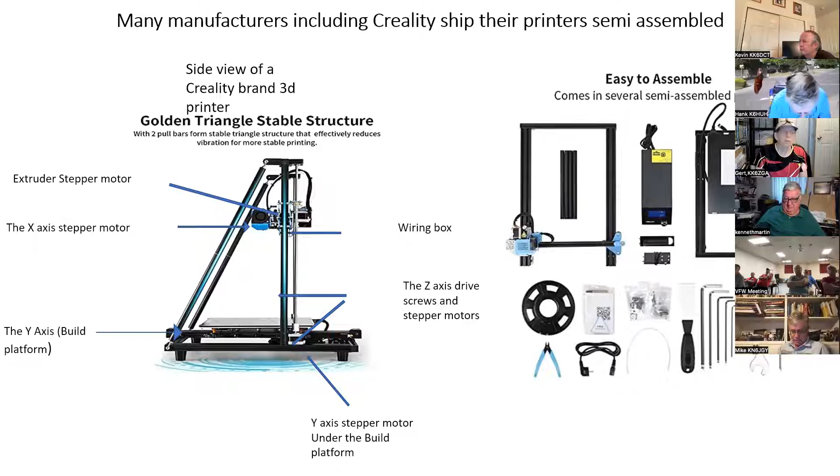Commercially available hobbyist 3D printers: there are over 60 products available, starting at under $200 up to tens of thousands of dollars. Many are available from Amazon. Some popular brands are Creality, Prusa, MakerBot, Ultimaker, and many, many more.

Most of these products come only partially assembled and so require some assembly by the end user. To maintain the repeatability as advertised, care must be taken when assembling to use the proper manufacturer's torque specifications on all the hardware. It is always prudent to use the German torque specifications known as good and tight, rather than SAE inch pounds. For the Chinese products, the Asian good enough specs may be used. Keep in mind, all of these products use small metric fasteners for assembly.

Most of these kits come with a set of tools for assembling the printer. And that was shown on that last picture.

Not all 3D printers are commercially manufactured. Gert and I have a friend of ours who is building his own right now. It'll end up being about 4 by 4 by 4 feet.

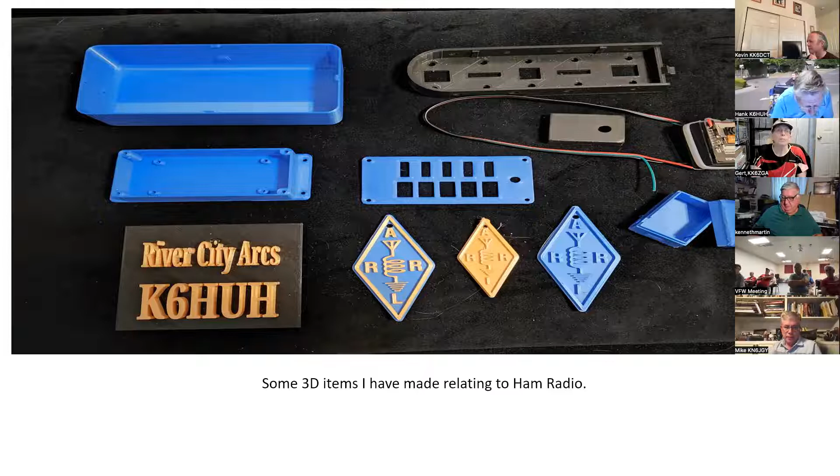Another use could be antenna parts such as insulators, balun housings, and coil forms, etc. Many hams are using Raspberry Pi single board computers. There are several 3D printed cases available. Just about any insulated container you would want is available.

This is something that I made for Carol. She got the files for me, and I turned this out on my printer for her. It's an interesting project. For those of you that haven't seen this yet, you should go to that site and read the presentation she made. It's very interesting.

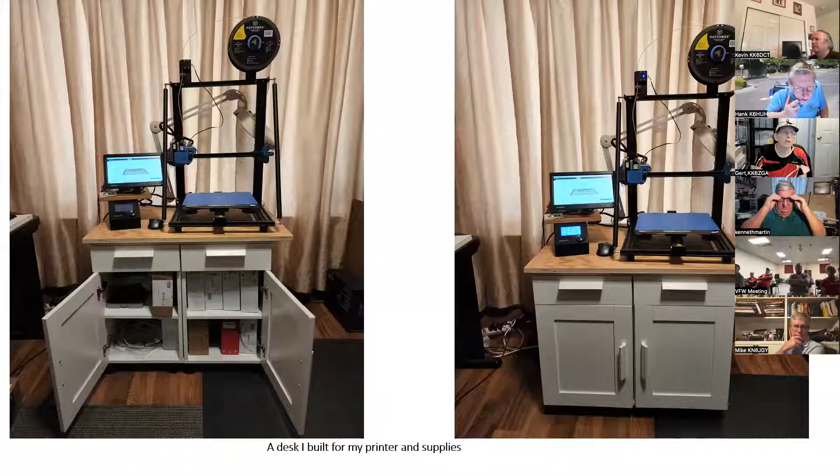Okay, some modifications I have made to my printer. There's one. I built a desk to support my printer from 2 inexpensive IKEA cabinets I mounted on wheels. I bolted the cabinets together and added a plywood top surface. These cabinets also have drawers and storage shelves for tools, spare parts, and filament.

I made a miniature Arduino Wi-Fi camera to monitor the project while it is printing. It can be mounted anywhere on the printer, including the movable Z-axis, to permit seeing the model as it is made.

When the weather warms up... well, the weather has warmed up, but I want to build a housing out of clear plastic to hold the entire printer. That'll protect it from weather and maintain a more constant heat. I'll put this out on my patio because I've got electrical outlets available out there.

I have a single board x86 based computer that runs Windows 10 with a 10-inch color gimbal mounted monitor. I also run some software called Octoprint. That's a program that permits plugging the printer directly into a PC USB port for printer access and control on a machine code level.

Some hobbyists use Raspberry Pi computers because they are so small and inexpensive. Originally, I was going to use one of my Raspberry Pis mounted to the back of this monitor, but I don't speak very good Raspberry Pi, so I didn't do that. That's a close-up of the 10-inch screen that I'm using, and that's the 486 single board computer that I use.

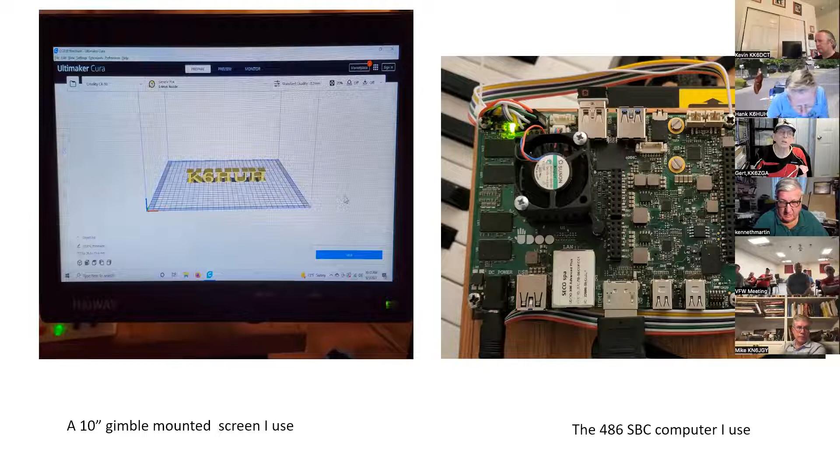How to get 3D printer models? Well, you can do it from scanners, like a 3D camera. Most of these, you mount your model that you want to make on a platform that turns, and there's multiple cameras that take pictures, and you end up with a 3D picture after running it through some special software called a mesh mixer.

There's free programs like those from Autodesk, such as Fusion 360, Tinkercad, AutoCAD, and others, which are just fine for hand-drawn or engineering models. Autodesk is the company that makes AutoCAD, a desktop product that has been around for many, many years and has become an industry standard in the engineering, drafting, and machining industry.

There are free models available on the web. Thingiverse, STL Finder, Yeggi, and many more have STL files already made up, ready to print. All you need to do is plug them into your printer.

There are some websites where people talk about 3D printing. These are kind of interesting. There are more projects available here. I didn't want to take up too much time listing everything though.

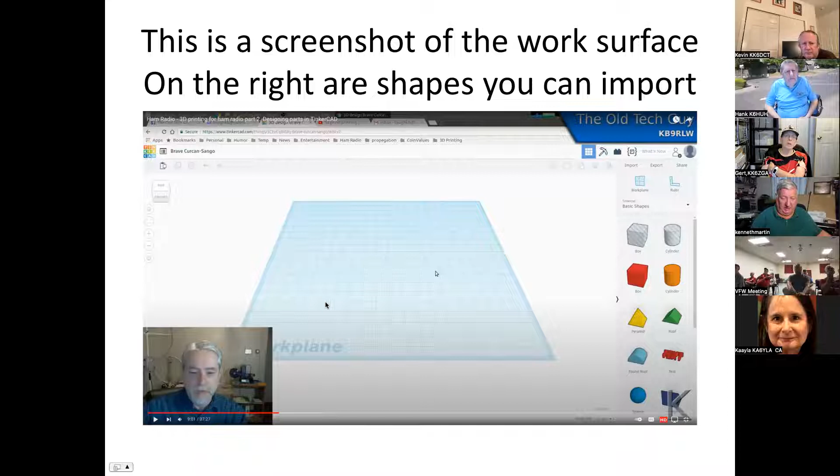We're going to make a small angle bracket with this demonstration. First, you import a cube, and then using these contacts, these little grabbers here, you flatten the cube, bring it down, and make it flat.

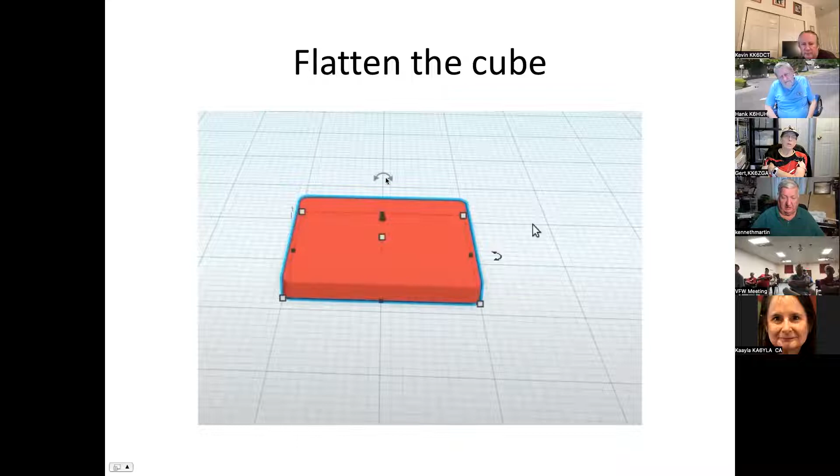Then you copy it and rotate it 90 degrees like this. Then you bring them together, and in the program you can add them together and it becomes one piece on the screen.

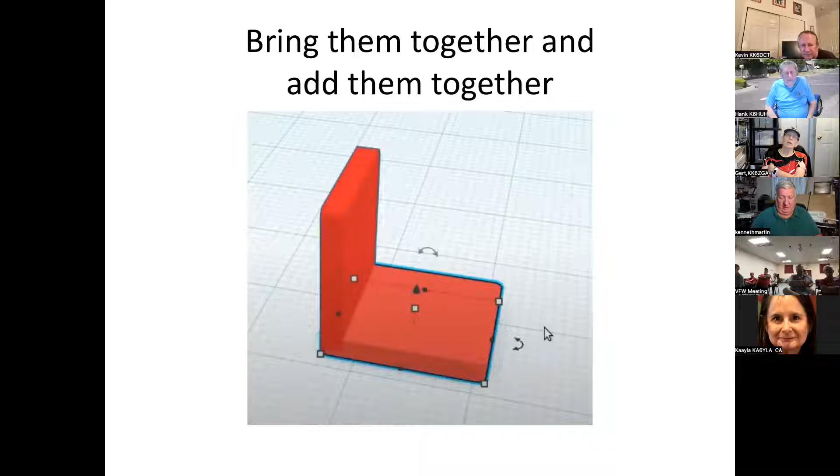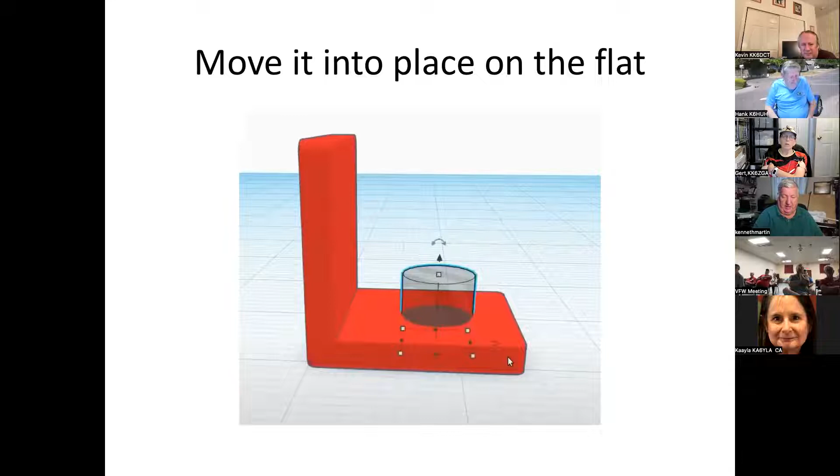Then you import a cylinder and drag it over and put it on the flat part, and drop it down so that it extends all the way through the part.

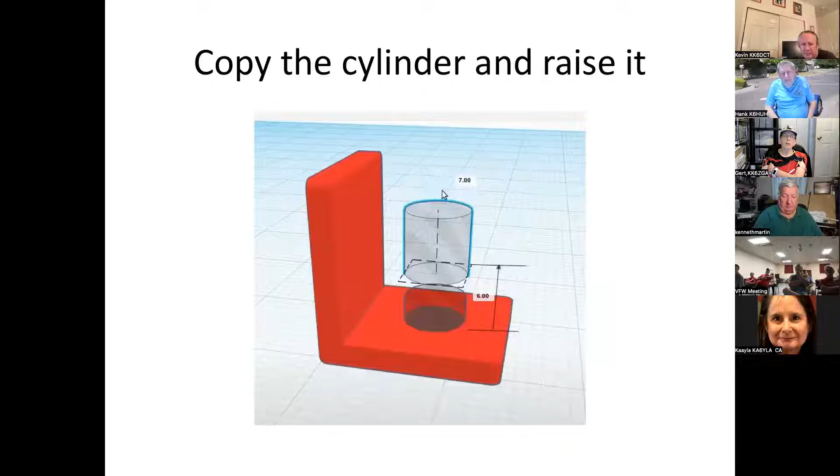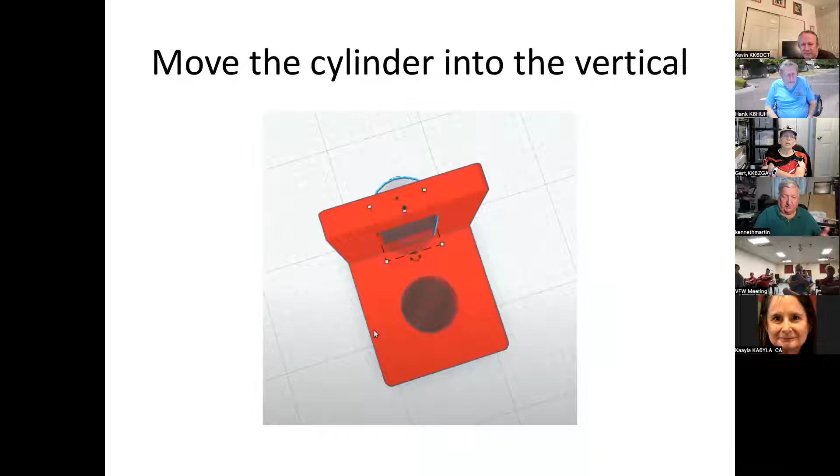Then you copy it and bring it up and move it over so that it is upright. Then you take those two parts and subtract them from the part, and you have two holes there, making an angle bracket.

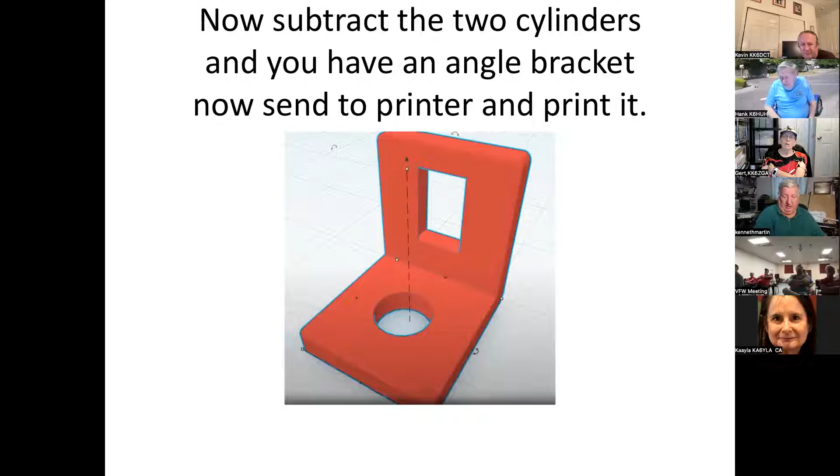Now all you have to do is send it to the printer and print it. Using that procedure, you can design any number of items by adding other blocks, subtracting parts, and modifying them as you want.

Some examples of what you can do - I've done a couple of these, others I took offline. So what was that?

Okay, here is a center for a dipole having a balun on it and a connector for BNC. You print the blue part out and then use it.

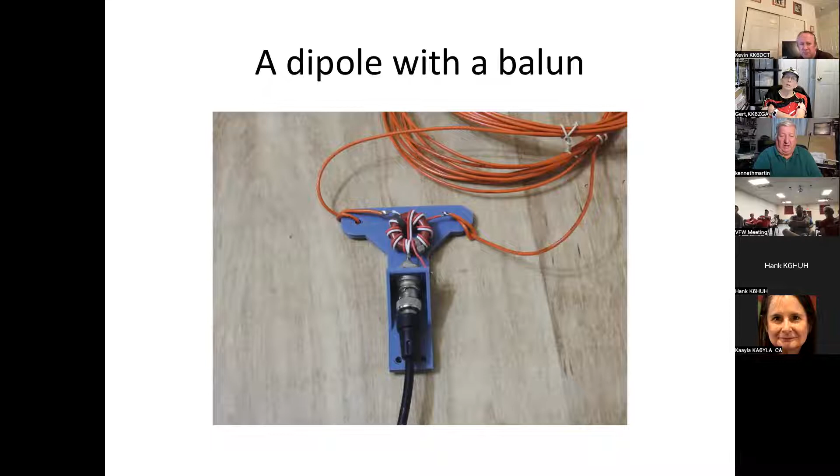Here's a box to put a balun or unun in. You've got the hole for the connector and then a hole for the antenna part.

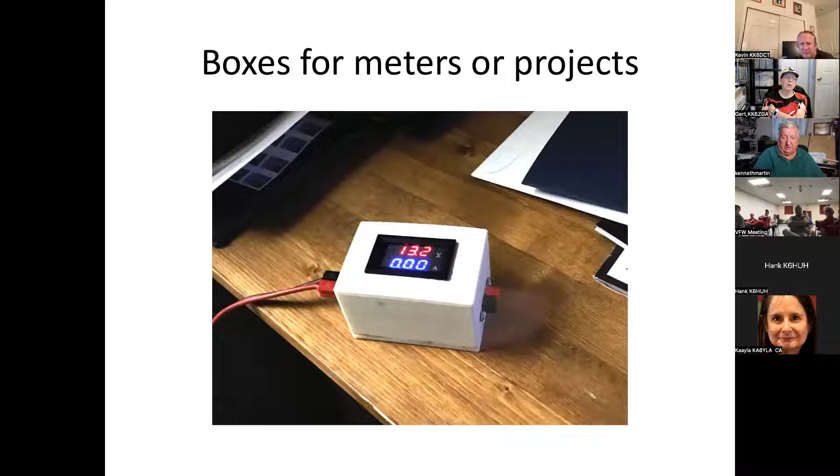Here is an inline volt amp meter that I built and printed out. You can make insulators for antennas.

There's a power pole breakout box. You print the one in black, one in red, and then you put the connectors on it.

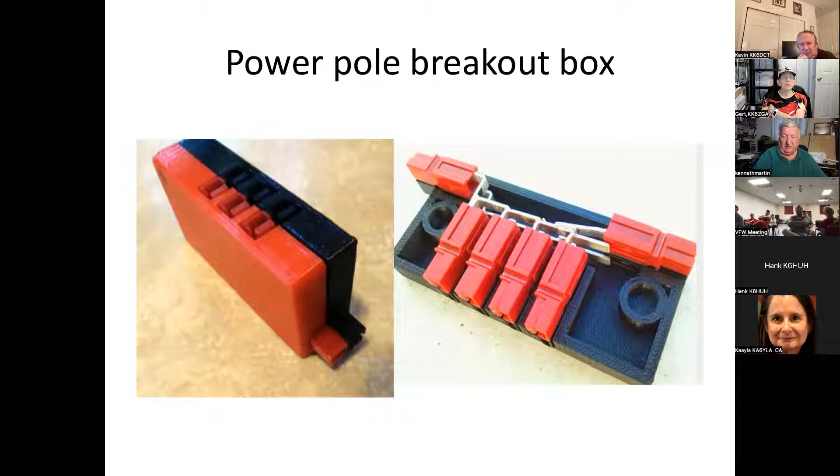Can do nameplates. Any kind of printing can be done. You can make a stand for a handheld.

In short, you can design and print any number of things for ham radio and other interests. I do some for my model railroading, and you can do it for other hobbies.

All right, that's it. That's pretty well good. Done.

All right, how strong are those parts printed out? Like that mast guy piece that you had, how strong is it? Moderately strong - I won't say you could hold a ton up with it, but it would work for most mast uses. And if you do break it, well, you print another one.

Great. Now, let's see, how do I get out of this? Try moving the mouse up to the top, and then there's a stop sharing button that appears. Oh, there we go. There you go.

Okay, thank you. Cool, thank you. Kevin? Yeah.